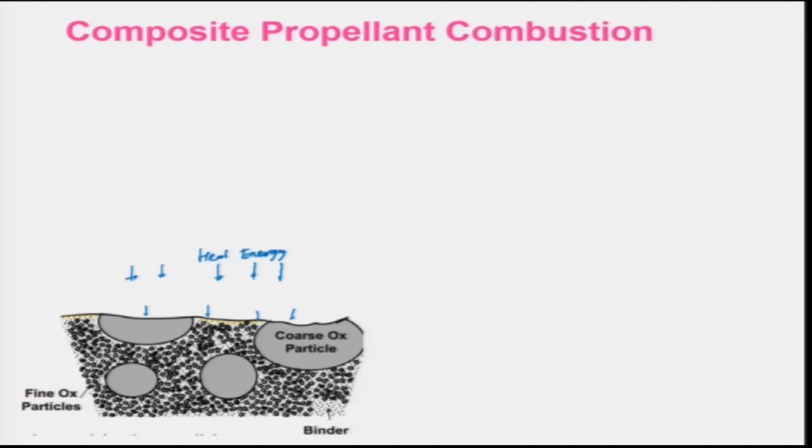If there is some initial ignition energy, let us say some heat being transferred towards this, this is the heat energy due to ignition. When it comes here, this oxidizer will be decomposed, so also the binder, producing products, and then the products will react with each other, and a flame may be formed during this process. Let us look at what the flame looks like in composite propellant combustion.

So, this is basically your propellant strand, and this is your flame located here. This is basically your flame surface, and that is supplying heat to the propellant burning surface. This is your propellant burning surface, and heat will be transferred from this surface to the virgin propellant grain. Heat transfer takes place due to heat conduction, and this portion you can call a preheat zone,

and this is being regressed, and as a result there will be a foam layer. You can see the preheat zone shown here, and bubbles will be formed and some gas will be released, so this region is known as the foam zone, where some bubbles are being formed. And of course, the temperature profile will look like this. There is a little increase here, and then it increases due to the flame, and then it reaches the maximum value.

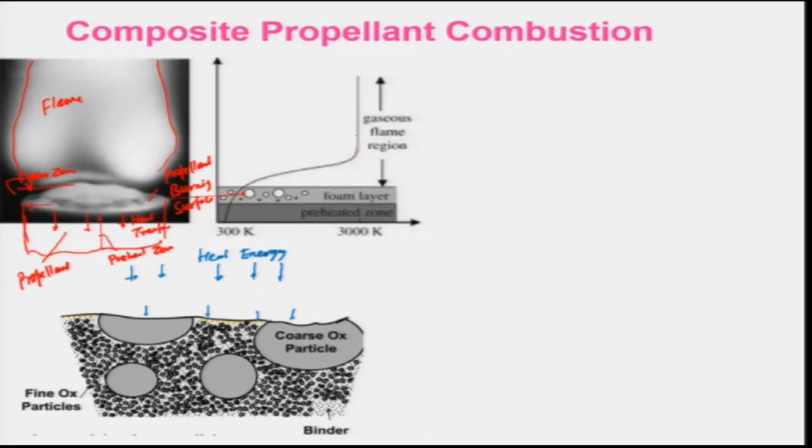This looks to be quite simple in nature, but keep in mind that, as we know, there will be binder, and binder means basically the fuel, and AP crystals. There will be an ammonium perchlorate flame, there will be some gases, and then there will be a granular diffusion flame, one can look at it.

But if you look at the various models that have been proposed, in the one we are going to discuss, basically a single crystal I can take here. This is the crystal, a single AP crystal, and this portion is your binder. So that we are taking: this is your binder and this is your AP crystal.

And when it is subjected to heating from the flame or from the ignition source, it will be undergoing decomposition, pyrolysis and gasification. In the beginning it may be endothermic in nature, but later on, when there is adsorption of some of the species, it may be a little bit exothermic in nature, when the flame is established.

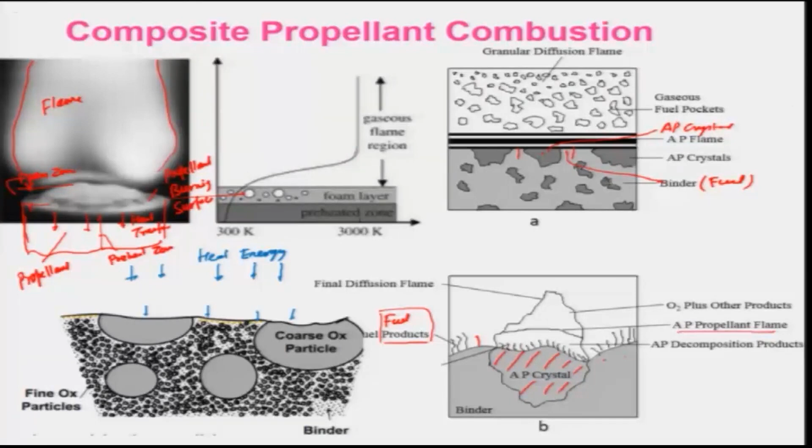This model was basically given by Beckstead, Derr and Price to estimate the burning rate and also look at how the combustion process can be incorporated in the model for the burning rates, the structure of the flames, temperature profile predictions and other things. Of course, there are several models available, but this looks to be capturing the physics of the problem. Therefore, we are considering what is known in literature as the BDP model for composite propellant combustion.

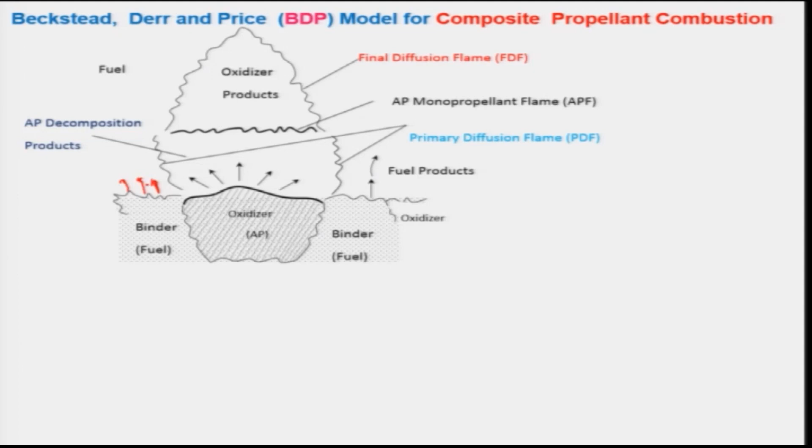So, as I told, the ammonium perchlorate crystalline particles are flanked with the binder. We are taking a very small portion of that, and when heat is transferred to the surface due to the initial ignition energy or some other energy source, both the binder and the oxidizer get decomposed. As a result, they will be converted into various products. For example, when fuel gets decomposed, thermally degraded, unburnt hydrocarbons and some radicals will be formed.

And when the oxidizer is decomposed, the ammonium perchlorate will be converted to ammonia and HClO4, provided the chamber pressure is greater than 1.9 megapascals. If it is lower, it may not really decompose. It will give rise to a certain amount of heat, and they will react with each other because the fuel and oxidizer are mixed all together. Therefore, it forms an ammonium perchlorate flame, or monopropellant flame, because fuel and oxidizer are already together, decomposed from the ammonium perchlorate crystal. It can give a temperature of about 1300 to 1400 Kelvin.

This is your flame. And besides this, decomposed products of the ammonium perchlorate will also be diffusing without really reacting, and mix with the decomposition products of the fuel, and then a flame is formed at the interface of the ammonium perchlorate crystal and binder, which is known as the primary diffusion flame. Keep in mind that in premixed flames they are already mixed together, but in this case both the fuel and the oxidizer emanating from the decomposition of ammonium perchlorate mix at the interface of the diffusion flame.

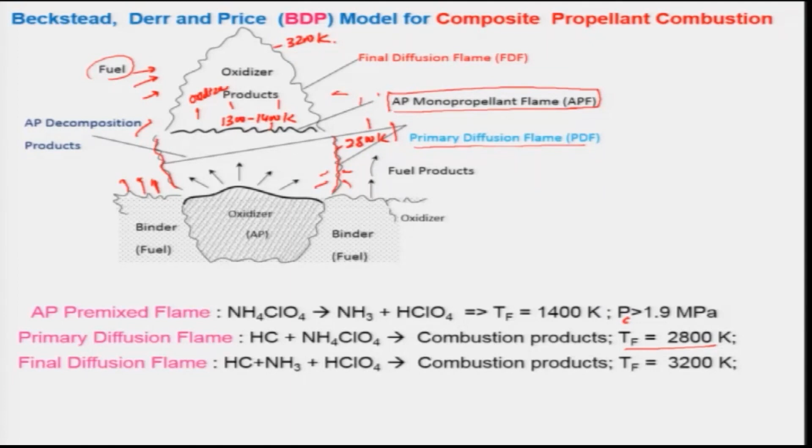Okay. The final diffusion flame can be formed when the ammonia is reacting with the unburnt hydrocarbon and also HClO4 and giving the combustion product, and that temperature could be around 3200 Kelvin. This is the temperature we get. And keep in mind that this will be dependent on the chamber pressure.

As I told, if the pressure is low, then the time required for the complete combustion of the other chemical reactions will be quite slow as compared to the diffusion time. So, therefore, the premix combustion will be predominant. That means, at low pressure the regression rate or the burning rate is controlled by premix flame.

But at high pressure the residence time required for the combustion to occur will be controlled by the diffusion process, because at high pressure the chemical reaction will be occurring very fast. So, therefore, at high pressure regression rate is controlled by diffusion flame.

Keep in mind that although we have shown the flame in an exaggerated manner, taking a very large spatial domain, the thickness of the flame will be of the order of a few mm, and the thickness of the flame will be decreasing when the pressure of the chamber increases. It is quite complex in nature, and therefore, it is not really possible to discuss in this class.

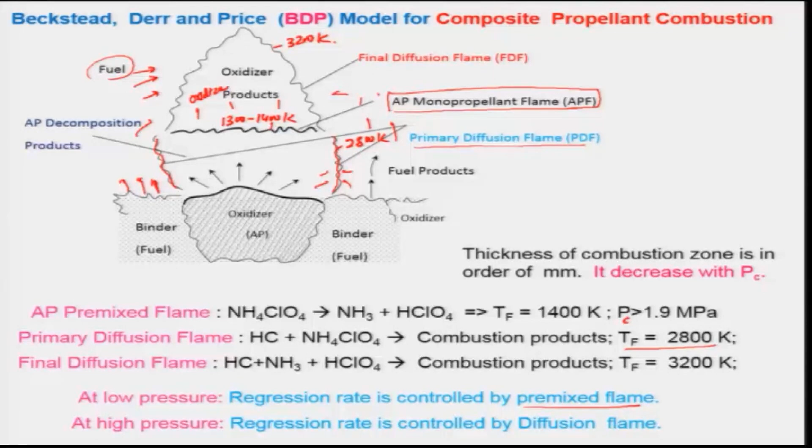However, it is very essential to know the regression rate, and if some of you are interested, you can look at this paper to find out how the regression rate can be obtained by using an analytical model. But keep in mind that the burning rate is an important parameter which must be known for designing a rocket engine, and also for learning how it will be operated and its performance. So, therefore, we need to really know the burning rate of the propellant.

So, question arises, how can we measure the regression rate of propellant? Of course, one can predict the burning rate or the regression rate of propellant, but measurement is very important. So, what are the ways by which we can measure the burning rate of propellant? Of course, it is very easy if you take any solid fuel and look at how the regressing surface or the burning surface is receding with respect to time.

But in case of a solid propellant rocket engine, the propellant has to be burnt at high pressure. We know why we are using high pressure in the rocket engine. Therefore, it is obvious that the burning rate must also be changing with respect to the chamber pressure, and also the propellant temperature. Now, question arises, how we will determine the regression rate of the propellant experimentally.

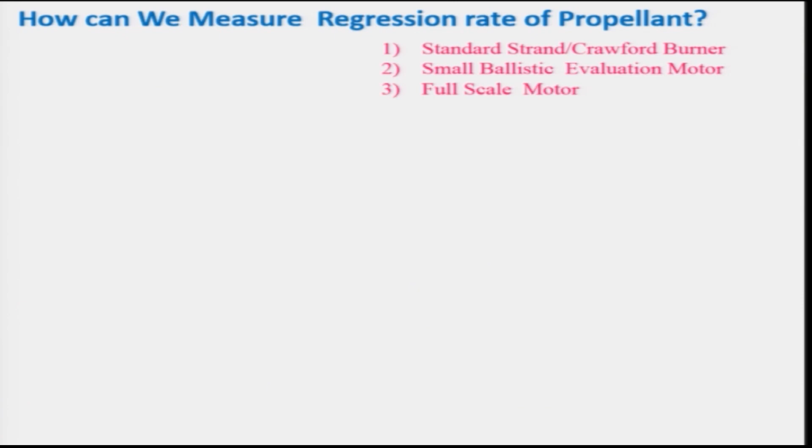So, there are three methods being used routinely. One is the standard strand or Crawford burner, another is the small ballistic evaluation motor, and the other one is the full scale rocket motor. Keep in mind that the third case will give you the actual situation and can simulate the actual condition, such that whatever regression rate you get will be the right one. But it is a very costly affair, quite complex in nature, and also quite risky.

Therefore, people have devised small evaluation rocket engines, but scaling is a big problem in that. However, they will be more realistic as compared to the strand or Crawford burner. But the Crawford burner or strand burner is used very much whenever one is developing the propellant for a certain application, so that you can change your composition and look at how these changes affect the regression rate at different pressures.

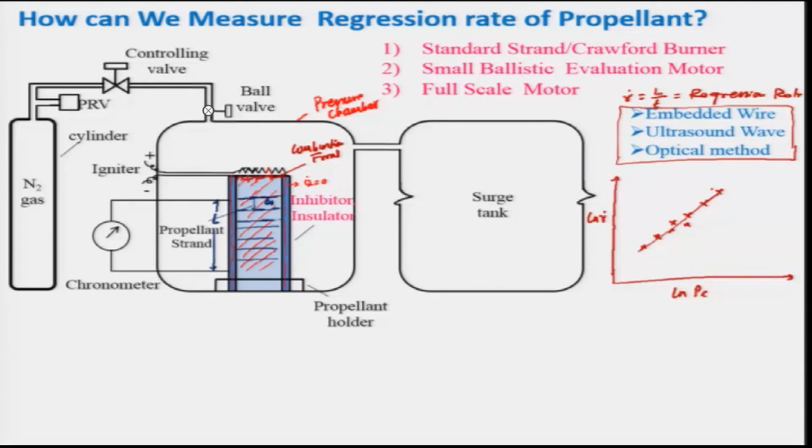So, you can plot this and you will get a relationship, that is r dot is equal to a p c to the power n. The slope of this will be n, and the intercept is ln a. From this I can get ln a, and I can get a relationship. This is a semi-empirical relationship, and interestingly this relationship can be valid for both double base propellant and composite propellant.

And keep in mind that n is known as the pressure or combustion index, and a is not a non-dimensional number, it has certain dimensions, and is known as the temperature coefficient. n indicates the extent to which the chamber pressure can affect the regression rate. And a is not a constant, it depends on the temperature. This relationship is known as Vieille's law, or St. Robert's law in literature. It is not a law, but people use it. It is an empirical relationship valid for certain kinds of propellants.

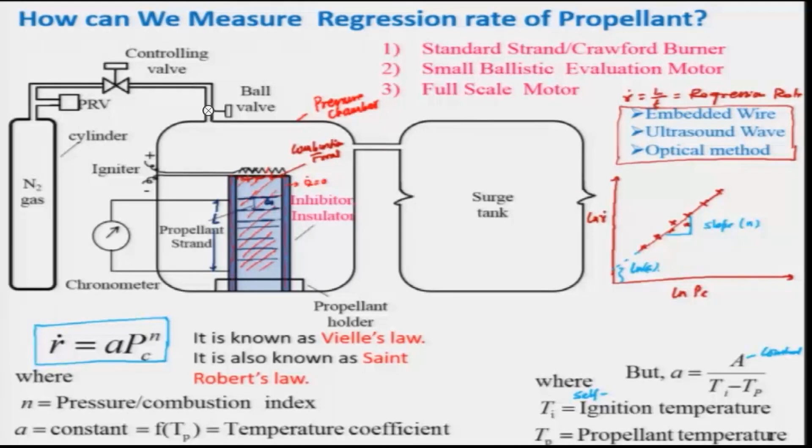And as I was telling, a is not really constant; a is a constant divided by T I minus T p. T I is the ignition temperature, or self ignition temperature of the propellant, and T p is the propellant temperature, which is similar to the ambient temperature where it is operated. Keep in mind that the burning rate data in this burner will generally be lower by 4 to 12% compared to the actual full scale motor, but it can be utilized as it is very easy to conduct the experiment and get the data.

So, with this we will stop; we will be discussing Vieille's law or St. Robert's law for the regression rate in the next lecture. Thank you very much.